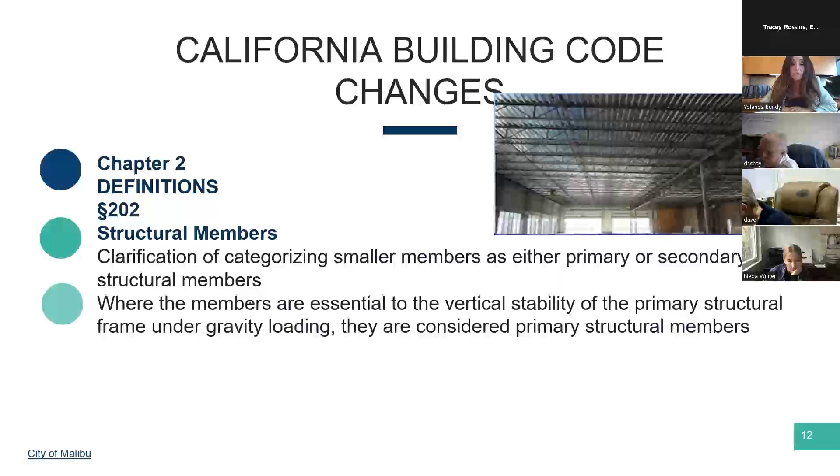Another big change happening in this code cycle is the incorporation of mass timbers throughout the California Building Code's different chapters. A new definition has been added under Chapter 2: mass timbers as structural elements of type 4 construction, primarily made of solid, build-up, panelized, or engineered wood products that meet the minimum cross-section dimensions of type 4 construction. There's new noncombustible protections for these mass timbers under Chapter 7, specifically dictated in 703.6, designed to increase the fire resistance rating and delay combustion of this mass timber.

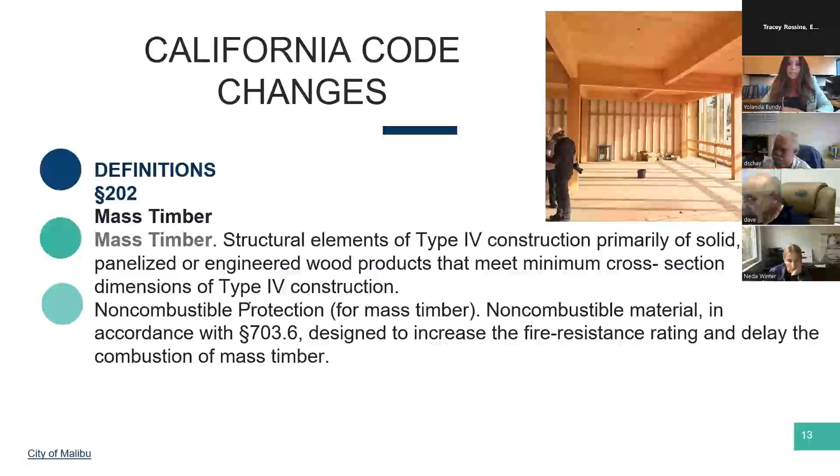Chapter 3 is a chapter that describes occupancy classifications and uses. One of the important changes, and this is important because this new term comes up over and over in the residential code and the energy code, is energy storage systems. Energy storage systems, when dedicated in used buildings, are listed as group F1. It is not considered an H occupancy, which is hazardous. It's also not considered an incidental use as it was previously defined in Table 509.1 of the building code.

As I mentioned before, mass timber has made significant changes to what we're seeing in the building code. I am not covering Chapter 4 or Chapter 5 due to timing, but also because these chapters are normally used in new construction for multifamily, high-rise, industrial, and commercial buildings. But I will mention briefly that in the new changes for Chapter 4, which covers special detail requirements and base occupancy loads, there has been new information added for floor surfaces in parking garages. There's also mechanical access for enclosed parking garages.

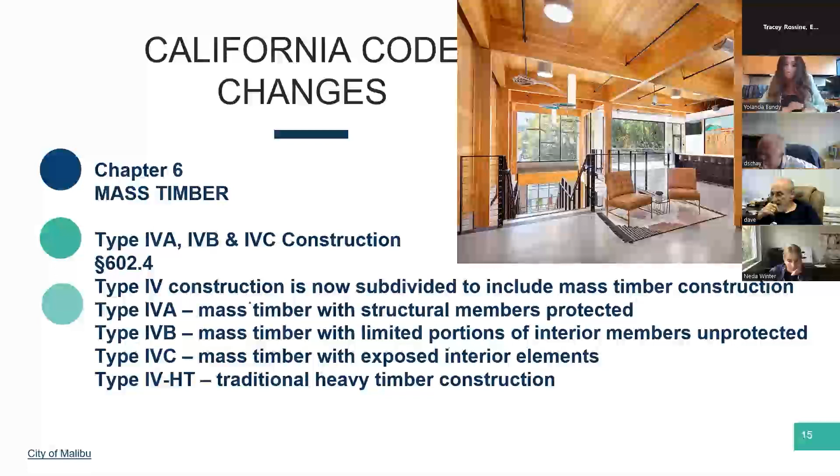Under Chapter 6, also, there is mass timber construction for type 4A construction with exterior walls protected. They can have a 40-minute fire resistant construction. Also, interior walls that are protected following Chapter 7 can achieve an 80-minute fire resistance protection. Type 4B constructions also have exterior walls protected with a minimum of 40 minute fire rating and interior walls with 80 minute fire resistance. And then your type 4C constructions, there's no added fire resistance.

Why am I mentioning this? Just because we see a lot of heavy timber in multifamily projects, but I'm thinking this new material is possibly going to start being used in our more complex single family residences. So I'm just highlighting this for the community and for the design professionals. The industry is really making a push for this new component.

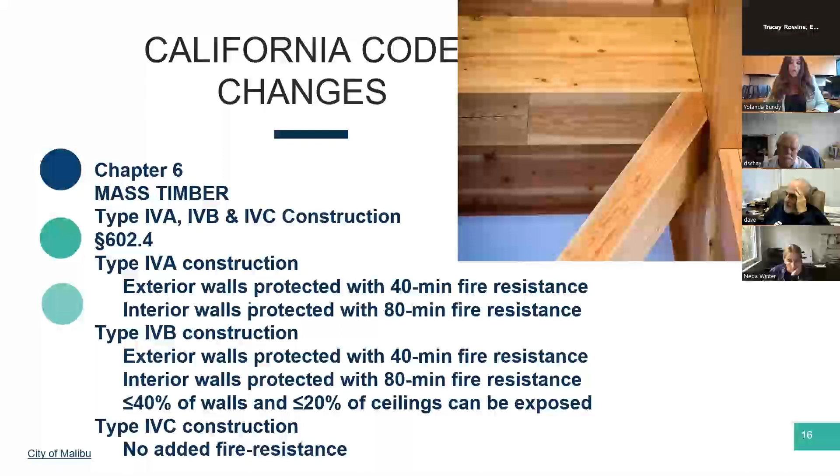Next slide, please. Continuing the conversation with heavy timber, special inspections for mass timbers have been added to Chapter 17 of the Building Code. Periodic inspection will be required for sealing and adhesive used in mass timber construction to protect joints and fire resistance rating building elements. So I'm making a note again, special inspection when we have fire rating building elements.

Next slide. This is an important chapter just because Chapter 7A deals with the materials and construction methods for exterior wildfire exposure, which all of the city of Malibu is located in.

The state fire marshals and CAL FIRE have made an effort in joining with the Building Standard Commission to continue providing features. As they're learning from different wildfires, they're incorporating new ways to prevent exterior exposure in these wildfire areas. They have been adding specific definitions under Chapter 7A, 702A, Fire Protection Plan. The definition has been amended to be aligned more with the fire code.

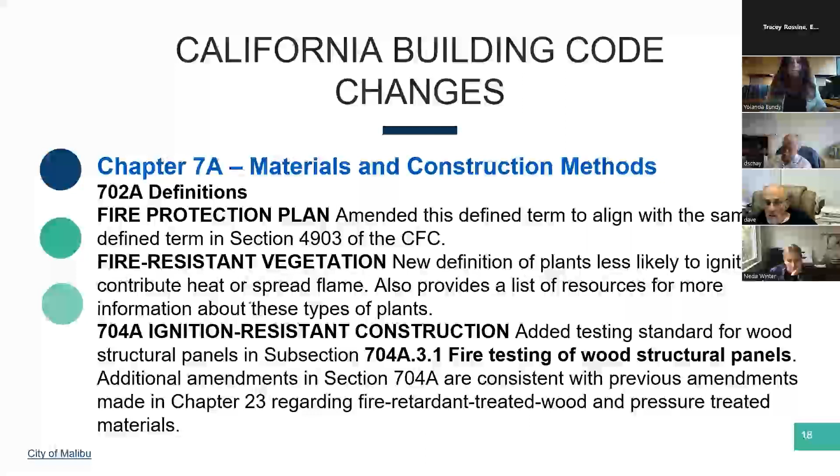Under the materials and construction methods, this is something I started talking about at the beginning of the conversation, on accessory structures and structures that do not require a permit because they're less than 120 square feet. Knowing that this type of structure can also create some kind of ignition, the state fire marshal has provided specifics, now having these accessory structures needing to conform with these sections.

It has been amended, and also a subsection has been created that organizes everything, categorized by distances from the applicable building, and mandates enforcement for buildings greater than 120 square feet. So I wanted to go over this specific section because this is something we all need to pay attention to, since this was an item never covered under the building code. I'm just going to read the section.

Section 710A.3 talks about where compliance is required for these accessory buildings to comply with this chapter. Miscellaneous structures that require a permit, or accessory buildings of any size that are separated from the applicable buildings on the same lot by a distance of less than 3 feet, shall comply with this section. Also, accessory buildings greater than 120 square feet, when separated from the applicable building by 3 feet or more but less than 50 feet, shall also comply. So any accessory building more than 120 square feet that is between the main house at 3 to 50 feet will need to comply.

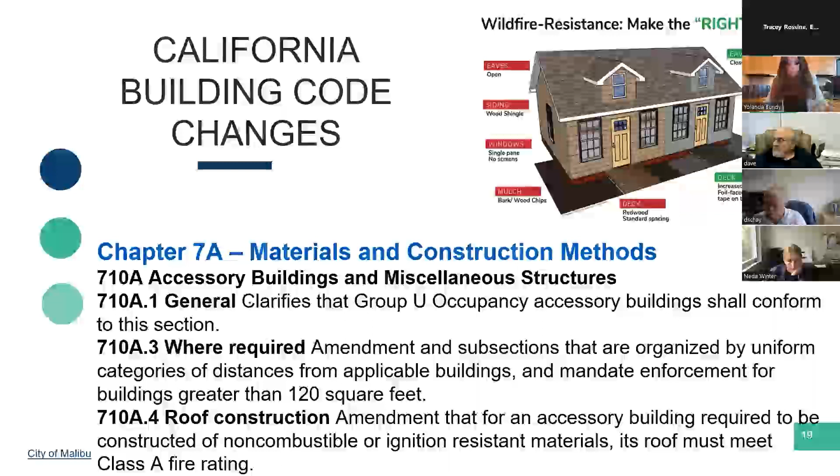I am not going to cover the rest of the California Building Code. The next one is Chapter 8 that talks about interior finishes, Chapter 9 is your fire sprinkler requirements, which are regulated specifically by our LA Fire Department, County Department, and also Chapter 10 talks about your exiting. Chapter 11 talks about accessibility for multifamily projects and commercial projects. We don't have time to go through all of them specifically, since the majority of the stock of structures built here in the city are residential. I'm trying to concentrate on the portions of the residential code that will provide the community with more information.

So now we'll start with the California Residential Code changes. The residential code changes are also aligned with the building code. Remember we talked about expiration of permits - now section R105.5.1 is also addressing this. Permits used to expire in 180 days, now they have 12 months to expire. So it's stipulated that every permit shall remain valid if the work authorized by a permit commences within 12 months after the issuance of that permit. Next slide.

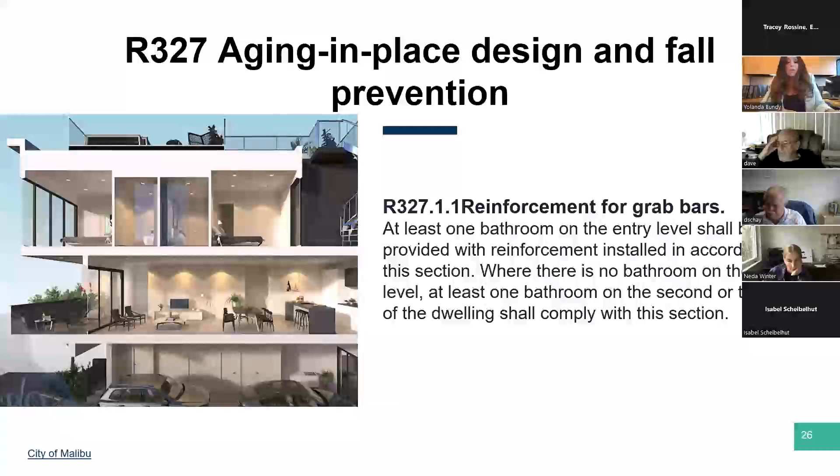So what is this reinforcement for grab bars? It is reinforcement that shall be solid lumber or other construction materials approved by the building department. This reinforcement should not be less than 2x8, which is nominal lumber. Other construction materials also need to provide equal height and load capacity.

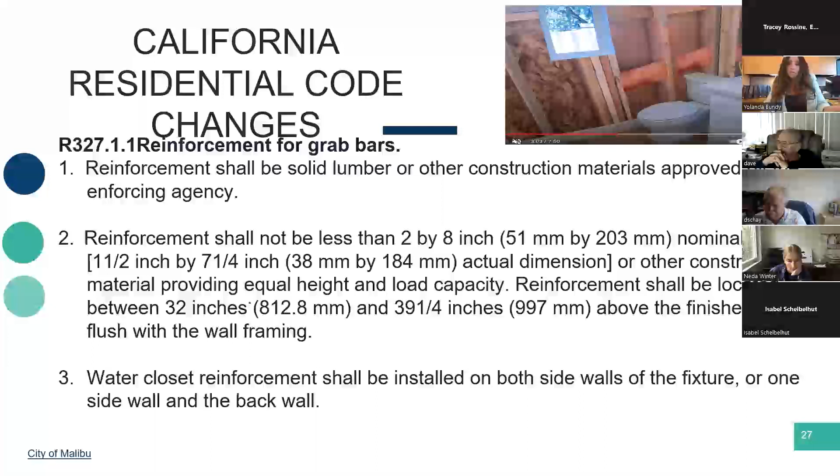There's also the installation of blocking around the water closet, which shall be installed on both sides of the walls of the fixtures, or one on the side wall and one on the back wall. So the requirements for this blocking need to be installed on the water closet, either on both sides of the walls of the fixtures, or one on the side wall and one on the back. There's an illustration there for you.

There's a specific dimension on where the blocking needs to be installed, 32 inches to 39.25, on the side portion of the wall or the rear wall. There's also requirements to add this type of blocking on bathtubs and showers.

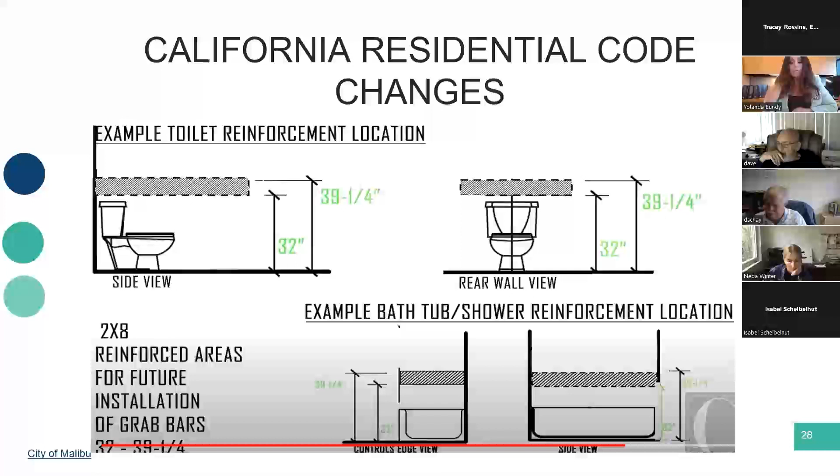Shower reinforcement shall be continuous where the wall framing is provided, with blocking all around the bathtub. In combination with bathtub and shower, reinforcement shall be continuous on each end of the bathtub and the back wall.

Additionally, back wall reinforcement for a lower grab bar shall be provided with the bottom edge located no more than 6 inches above the bathtub. So just make a note of that too.

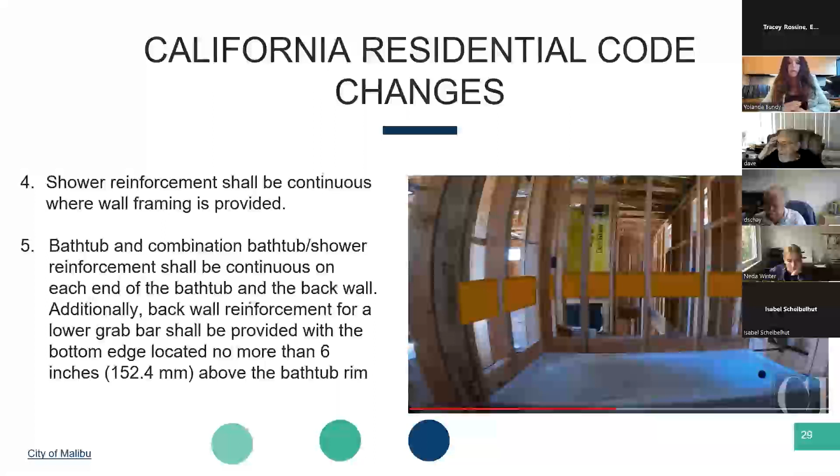I know I'm reading, and what I want to do is post the PDF of all the slides so you can have it for your reference. I'm hoping that all of you design professionals are already buying your codes and getting acquainted with the new changes, but let's continue.

Just another example for your shower reinforcement, the shower blocking, and the distance where they need to be located from the bottom of the floor, 32 inches to 39 1/4, as you can see.

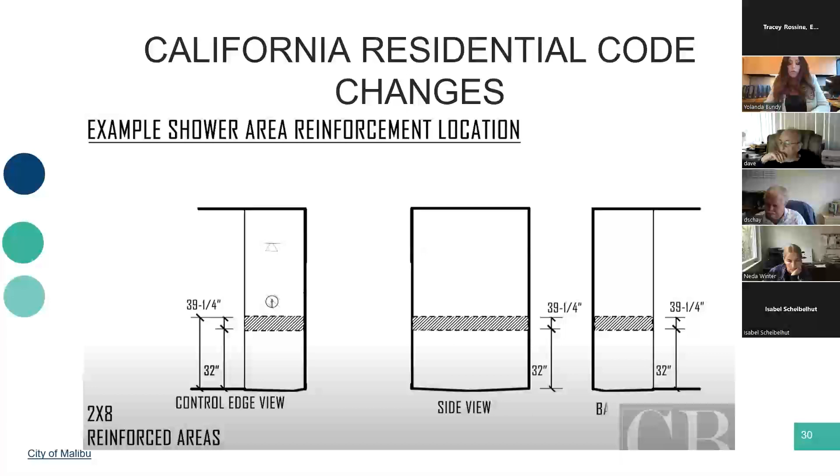But there are some exemptions to this blocking requirement. If a water closet does not have an adjacent sidewall capable of accommodating this grab bar, the provision is to have a floor-mounted or alternate grab bar reinforcement approved by the enforcing agency. That could be an alternative when you don't have a sidewall next to the water closet.

There's also an exemption when people buy a prefabricated shower enclosure or bathtub. There's no requirement to add the blocking, because the state requires that when these prefabricated shower enclosures are bought, they must integrate the grab bars, and that gives you an exemption to this rule.

Also, some shower enclosures do not permit installation of reinforcement or grab bars, such as when you have concrete walls, because it loses all purpose. Bathtubs with no surrounding walls would also not require this.

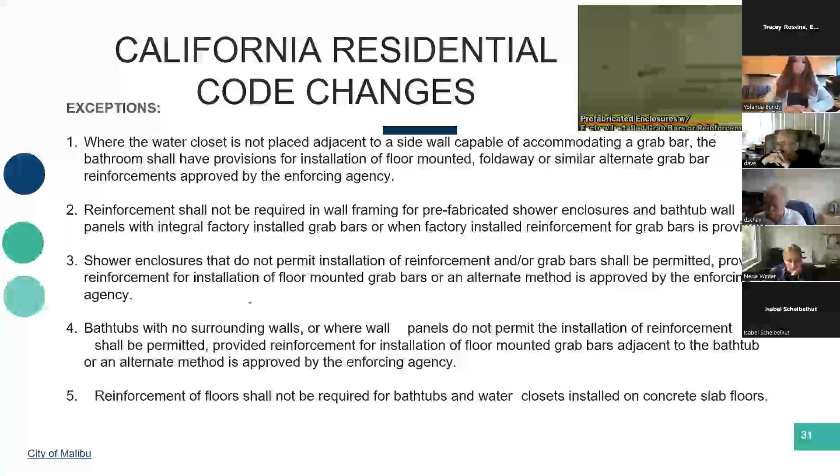The other item that has been added is electrical receptacles, outlets, switches, and control heights. This was already part of Chapter 11A and Chapter 11B for accessibility components, which a lot of people call ADA.

Electrical receptacles, outlets, switches, and controls, including controls for heating, ventilation, and air conditioning intended to be used by occupants, should be located no more than 48 inches measured from the top of the outlet box, and not less than 15 inches measured from the bottom of the outlet box above the finished floor.

Remember, the location of these receptacles is something we'll likely note during plan check, but at the time of construction, contractors will need to follow this, and our inspectors will also need to verify the location of these electrical receptacles, outlets, switches, and control heights.

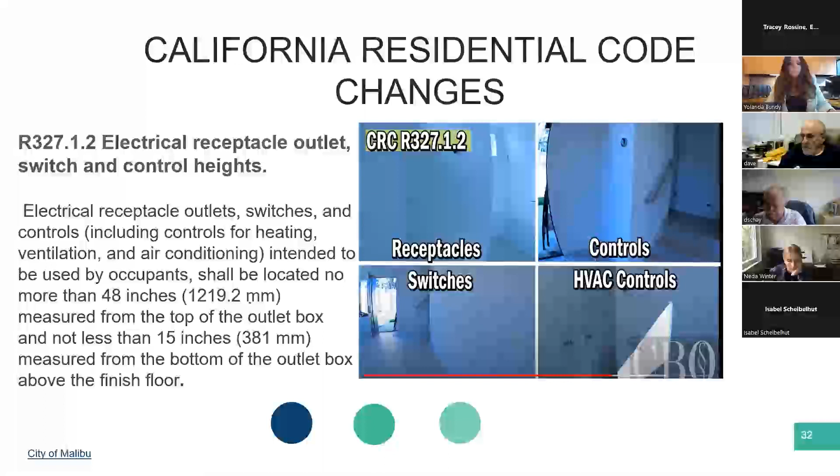There are exemptions to this too. When you have a dedicated receptacle outlet, a floor receptacle outlet, or a ceiling-mounted fan or control for appliances, this height requirement does not apply.

Receptacle outlets also required by the California Electrical Code on a wall space where the distance between the finished floor and the building feature above the floor is such that you have a window or less than 15 inches, then this does not apply and it's exempted.

So keep an eye on this, and it will apply more for the construction portion of it.

This would not take effect at the beginning of the year, but it does take effect on July 1st of 2024. So any plans submitted on or after July 1st of 2024 must comply with this requirement: at least one bathroom on the entry level shall be provided with a door with a net opening of 32 inches, measured with the door positioned at an angle of 90 degrees. This is for dwelling units, not only for the entrance but for the bathroom and one bedroom on the entry level, 32 inches minimum, effective July 1st of 2024, for plans submitted to the building department on or after that date.

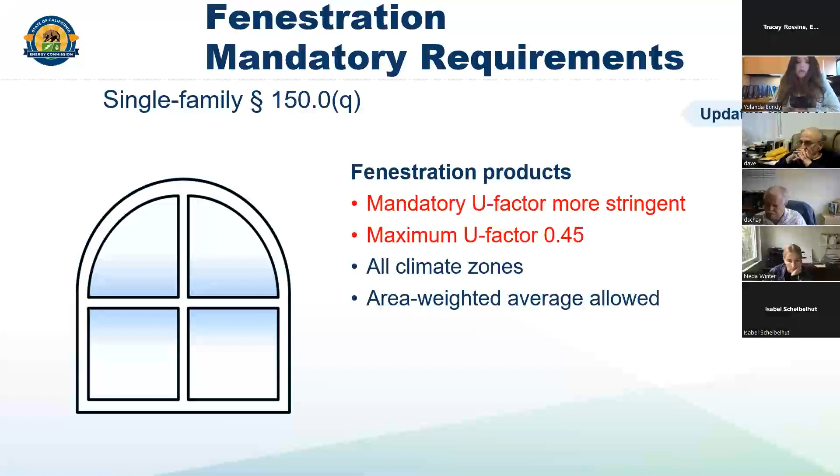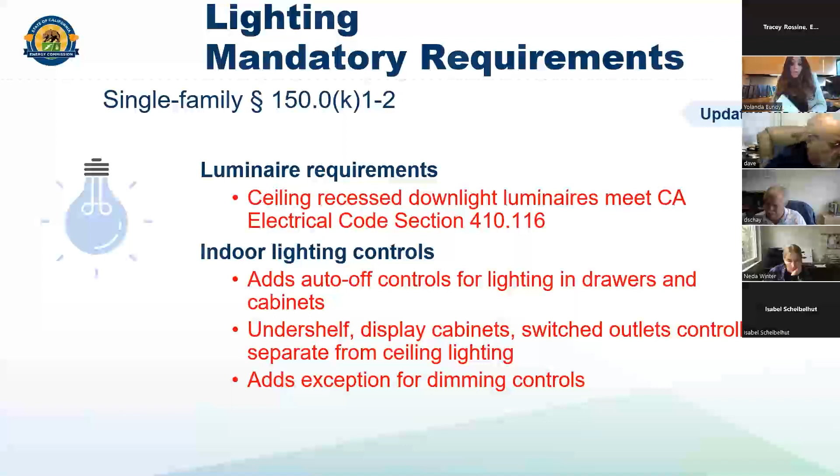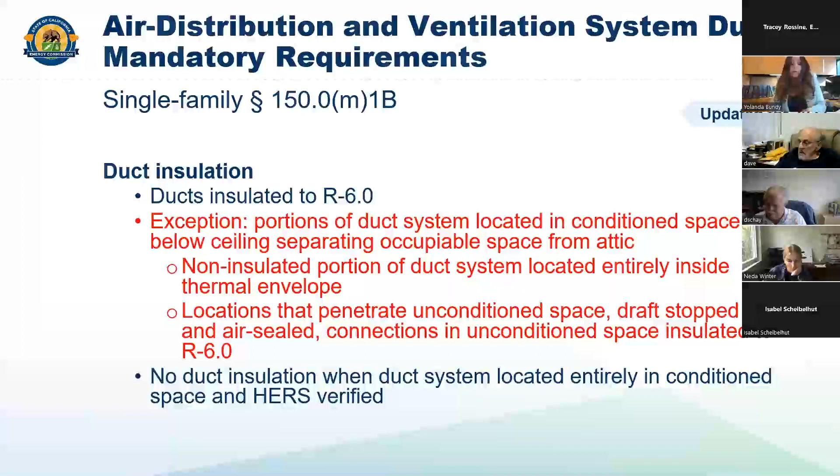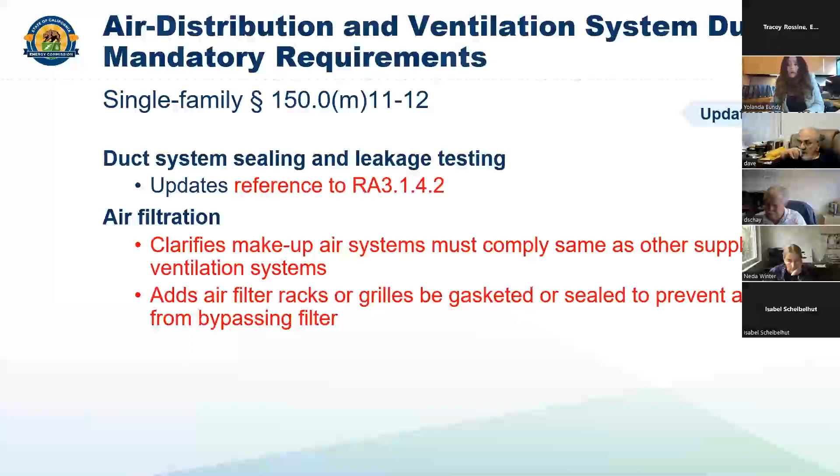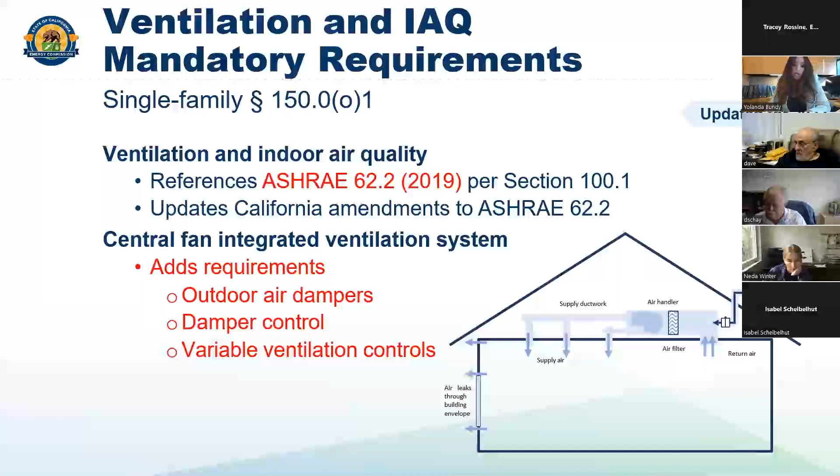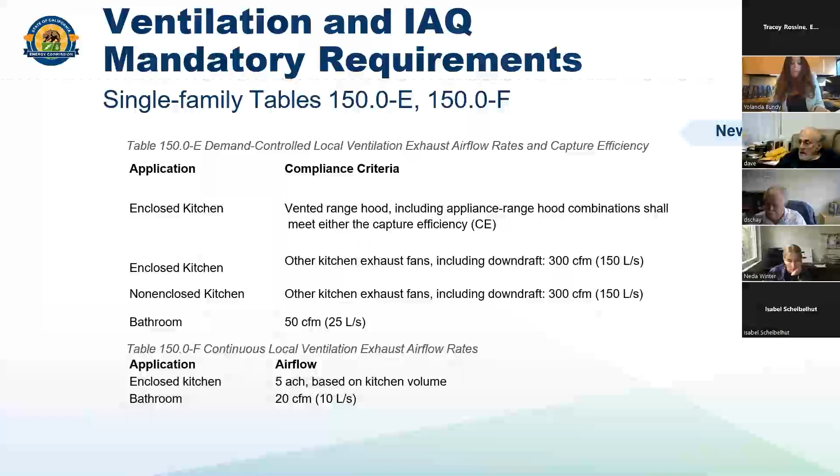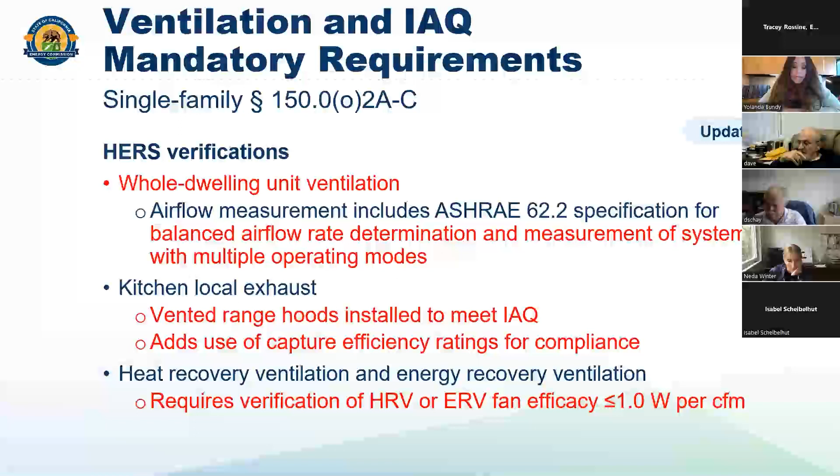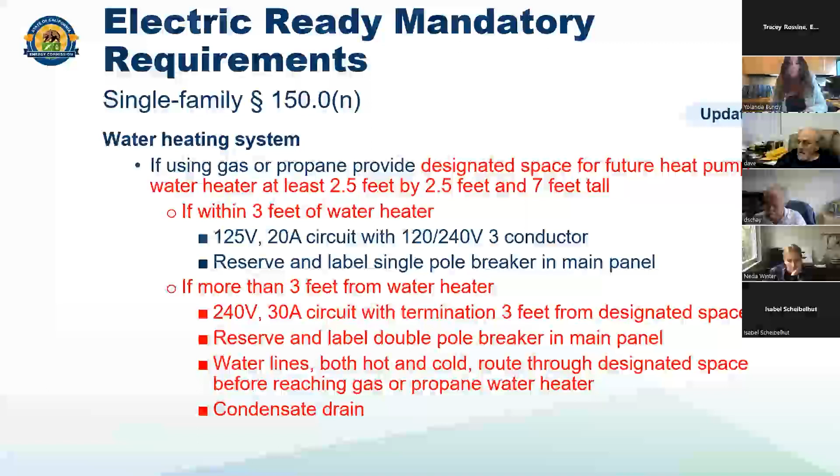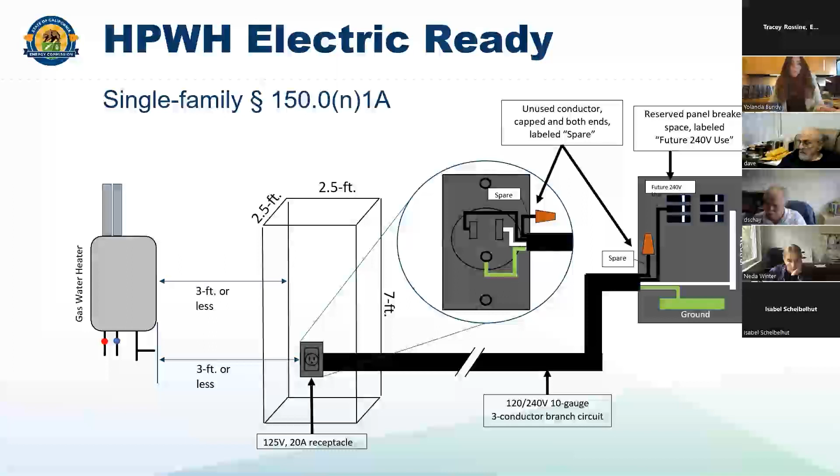Next slide. Again, another water heater pump, the location and the double pole breaker that is going to be for future use. Another graph that is important for everyone to know.

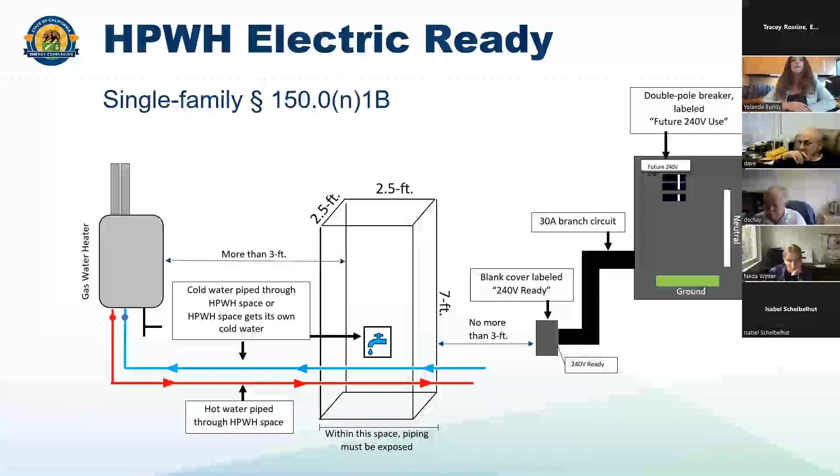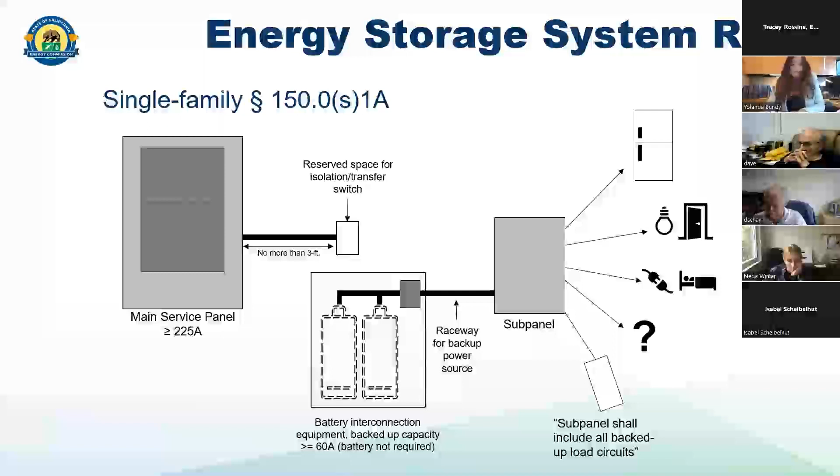Next slide. And another energy storage ready graphic from the main panel, also important for me to share this with you.

Next slide. Continue talking about electrical ready mandatory requirements also, right? So it's not only having your battery backup, having your water heaters that are going to be electric ready, but it's also talking about your electric ready cooktop. So your stoves need to, if you're using gas, it's good, but if it's a new home, you need to provide the infrastructure, so eventually this could be a cooktop that is electrical. It also adds requirements for electrical clothes dryer ready. And this is the new language on the code, electric ready, so please get used to that terminology. This is, as I said, new mandatory measures, minimum mandatory measures for the state of California.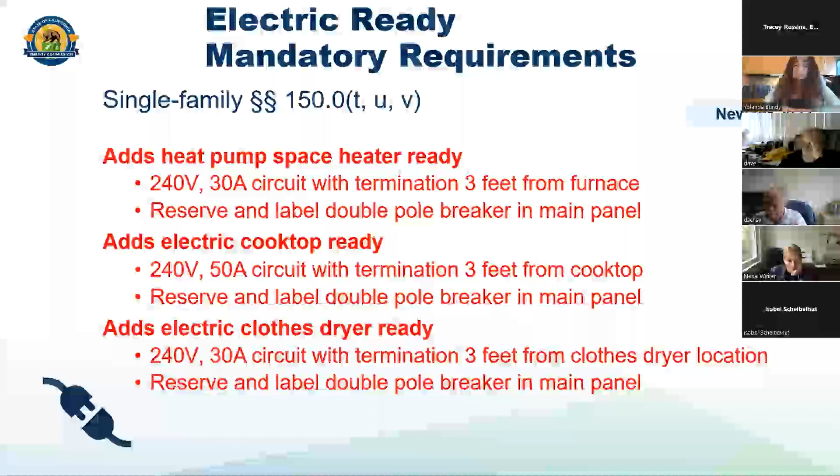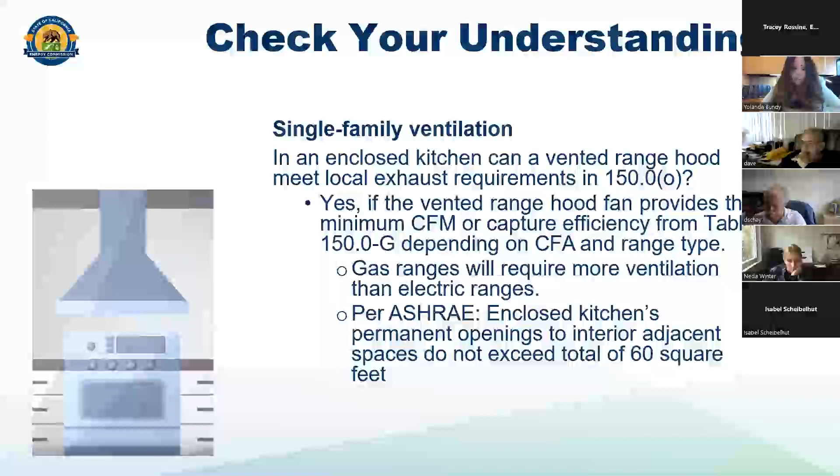Next slide. I took this also out of the Energy Commission just because it's a good way on how they're wording things out. They're talking about vented range hoods, how they meet the requirements, and that gas ranges will require more ventilation than electrical ranges, and you all know that, but I just kind of want to share that with you.